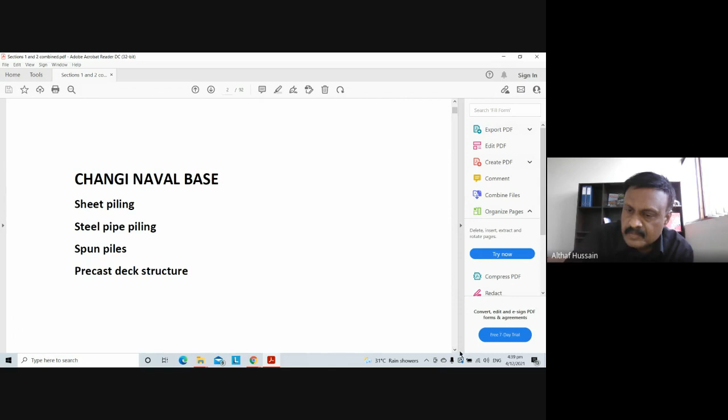Together with this project, there was one beacon, called the Frontier Beacon. This was constructed 3 kilometers from the shore, and is supported by 4 steel pipe piles.

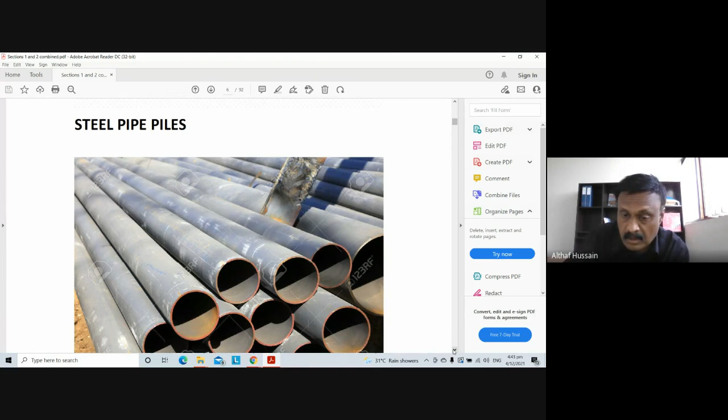These are steel pipe piles. Before driving, they are tubular sections. The piles are classified based on materials - one is steel pipe, steel, and the other is reinforced concrete, which includes precast piles as well as cast in situ piles. These are pipe piles before driving, and here you can see the piles driven in the sea.

These are the spun piles, as I was talking about earlier. They are also tubular, with a hollow portion at the center. They're called spun piles because the manufacturing involves spinning - the wall is very thin and reinforced to make sure the concrete is properly compacted inside. During spinning, the concrete has no honeycombing, giving a very sound, compact concrete. That's why they're called spun piles, manufactured by spinning.

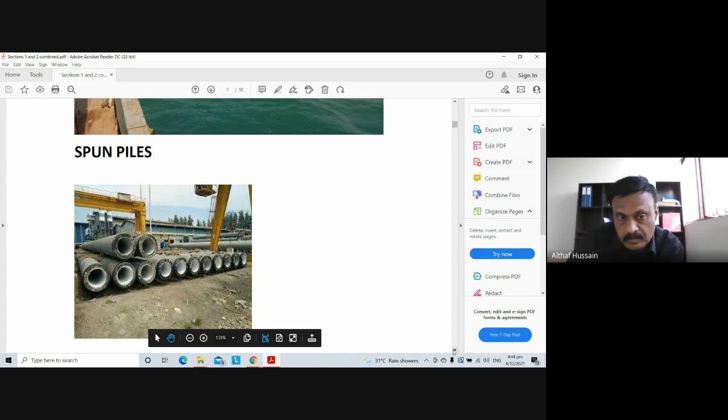The spun piles usually have steel shoes at the toe, because these precast spun piles are driven into the ground using very heavy hammers. In order to facilitate penetration through hard stratum, there are shoes at the bottom. The first section usually comes in lengths of 12 meters, 6 meters, and so on. After driving the first section, we join the next section by welding, then continue driving until the toe level is reached.

The depth of penetration depends on the load it will carry. In piling, pile capacity comes from two factors: end bearing and skin friction. Skin friction is from the periphery area of the pile interacting with the soil, while end bearing depends on the stratum it's founded on. The depth and size of the pile are decided based on the loads to be taken.

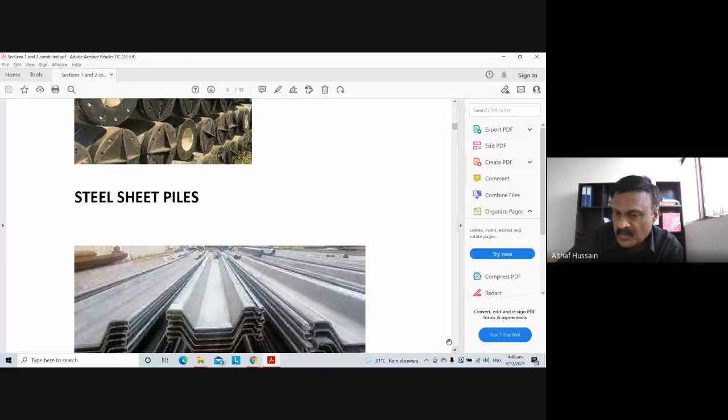Then there are steel sheet piles - this is before driving and this is after driving. Piles are also classified based on function. One function is as foundation piles - spun piles, bore piles, steel pipe piles are basically for carrying load as foundation piles. Whereas the sheet pile is usually a retaining structure, or acts as a fender wall in water. For retaining on land, it will be an earth retaining structure.

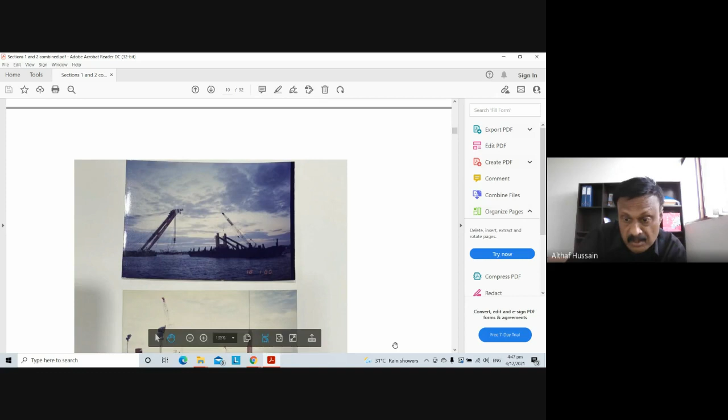These are some photos during construction. Here you can see the barges - the crane barge, the floating barge, material barge, all those things. Here you can see the spun piles, and here we have the sheet pile, and this is a portion of the barge in the photo. These are all spun piles, and these are temporary structures for facilitating access onto the pile for working.

So above the pile there'll be a pile cap. So the pile cap construction, then followed by a deck structure. The deck structure was all precast units, brought from Malaysia and Indonesia at that time. All the transportation is by barges, and the barges will be propelled by tugboats.

These are some photos during the construction of the Changi Naval Base. When we started, in the beginning, the first month or so, there was an unprecedented high tide, much higher than usually expected, and a portion of our construction collapsed into the sea.

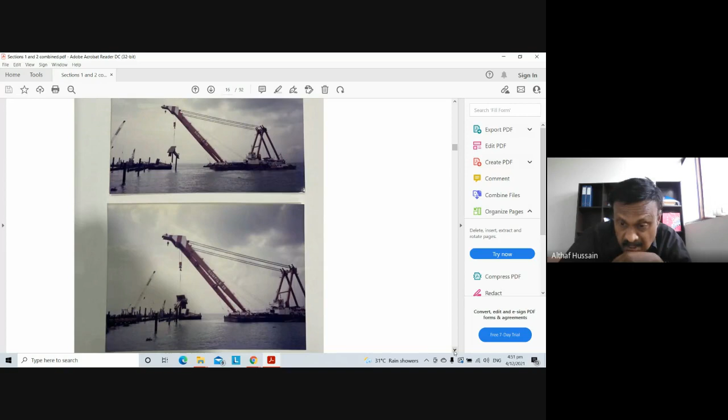Another project I have been involved in is Marina Bay Sands, a recent one, within the last 10 years or so. This project has diaphragm walls and bore piles. Just now I told you, based on function, these ground engineering structures can be divided into two types. In this case, the diaphragm wall is an earth retaining structure, and the bore piles are the foundation piles.

Marina Bay Sands comprises three 55-story buildings with a roof garden. Here the bore pile sizes usually vary from 500mm diameter to 3 meters and plus. Marina Bay Sands involved pile diameters up to 3 meters, and the depth goes to about 60 to 70 meters. All this depends on the column loads, how much load needs to be carried by the column. So the pile layout, sizes and numbers are all designed based on these load combinations.

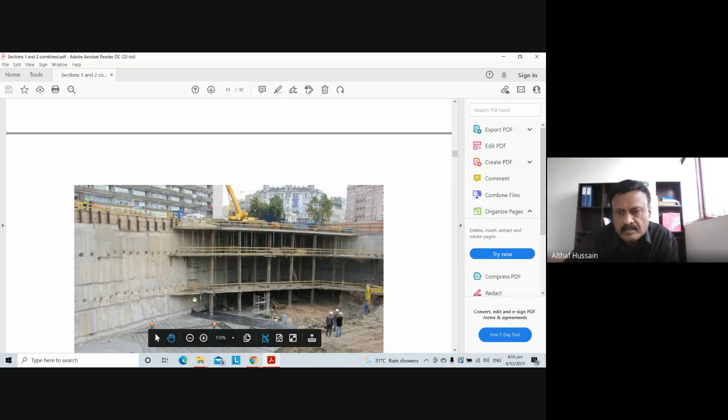Another prestigious project I have been involved in is Jewel, at Changi Airport, one of the busiest airports in the world. Recently a building called Jewel was constructed. This was built concurrently while all flight operations were going on, because no operation can be stopped for construction, and also the area around Changi Airport is very congested with busy traffic all the time. So a lot of traffic diversions had to be done for this.

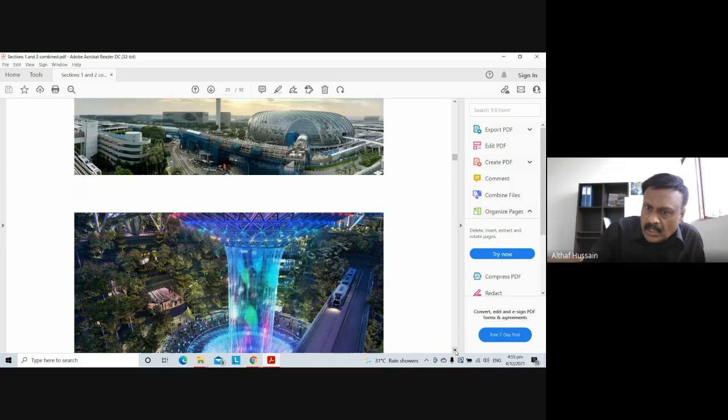This project, the Jewel, involves 5 basements and also 5 stories. This is inside the Jewel, the fountain inside the Jewel. It attracts a lot of tourists from all over the world. This is a SkyTrain track.

So here it is, basically diaphragm wall and bore piles, and there were contiguous bore pile walls also. Diaphragm walls, as I told you, are concrete panels, and bore piling is for foundation.

This contiguous bore pile wall is another ERS, earth retaining structure. The contiguous bore piles involve bore piles installed continuously with a small gap. I will show you a photo - see, this is a contiguous bore pile wall, a kind of earth retaining structure.

There's a Jewel project for the 5 basements. The area for excavation was bounded by diaphragm walls, but this contiguous bore pile wall was used for the car park ramp. See the ramp going up and down - those ramps, the side earth was retained using the CBP, contiguous bore pile wall.

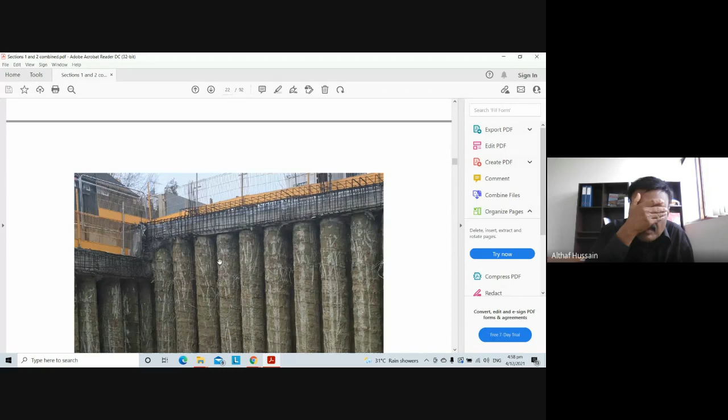Subsequently this gap will be plugged using shotcreting or a skin wall, because this earth retaining structure, apart from retaining the earth, it has to stop water flow - the groundwater, seepage, all those things. So it has to be watertight as far as possible.

So this is also CBP, contiguous bore pile wall. Then another project I had involved is the Police Cantonment Complex. This also involved diaphragm walls and bore piling.

I'm just showing some typical projects so as to introduce different kinds of piling. This is another project, Woodlands Police HQ. Here the ERS, the earth retaining structure, is a secant bore pile wall, and the foundation is bore pile, foundation bore piles.

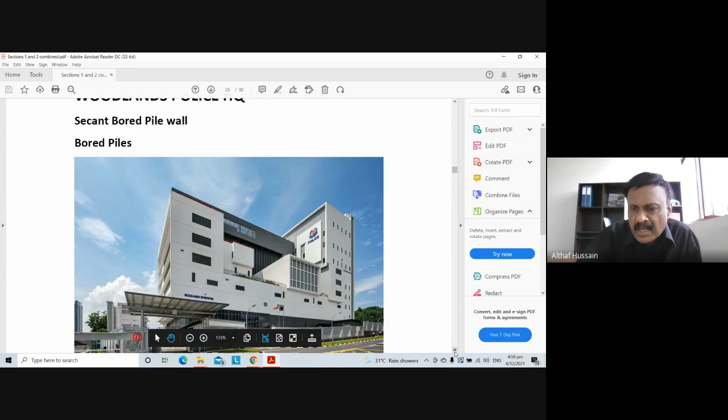So secant bore pile, it is somewhat like a CBP, contiguous bore pile wall, but there's a difference. In CBP, the piles are installed at a spacing where the gap is only about 100mm. In secant bore pile wall, there are 2 types of piles.

One is a primary pile, this one, then we have the secondary pile. If you notice, the secondary pile has a reinforcement cage, whereas the primary pile has no reinforcement. So primary pile, secondary pile - we also call it soft pile and hard pile.

So this soft pile will be installed first. Then we will be cutting through the soft pile to install the hard pile. So in this case, there is no gap - the wall we are producing is without any gap.

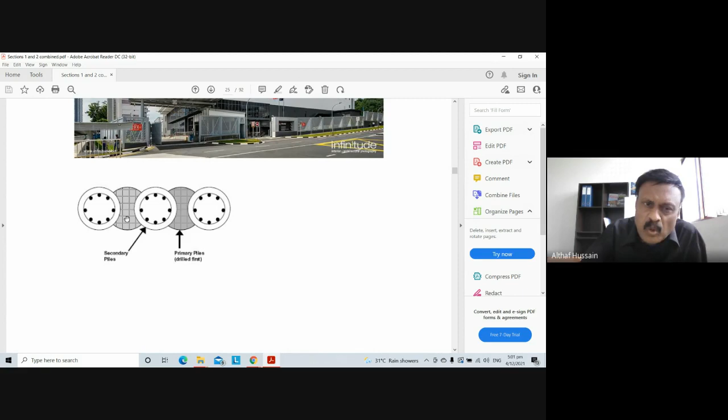Usually the concrete grade used for the soft pile will be much lower than the hard pile. The concrete grade used for the soft pile is usually grade 15 or below, and the hard pile will be grade 30 and above. Grade 30 means 30 megapascals, 30 Newton per millimeter square. So this is a secant bore pile wall.

Another project I was involved in is the King Center development. Its foundation is all steel H piling - steel H piles before installation. It has the shape of H, that's why they are called steel H piles. So this is after driving in.

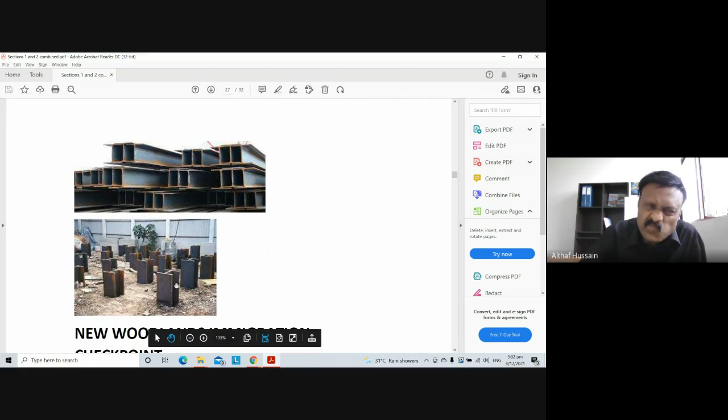Another project is the New Woodlands Immigration Checkpoint. Here the foundation is spun piles. You have already seen the photos of spun pile there - reinforced concrete precast piles.

I'm showing you all these photographs just to have an idea about the type of piles and the sizes of piles. You look at the number of stories, all those things - when the number of stories is more, the column loads will be more, so we need to provide for bigger piles with deeper penetration.

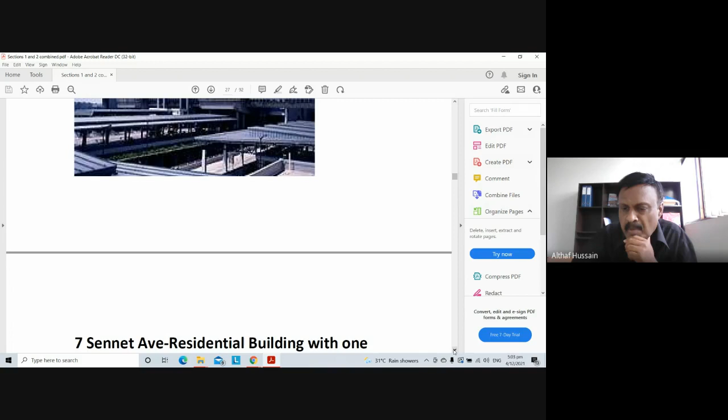Then there's yet another deep foundation which is a micro pile. Micro pile is a very small diameter pile, around 250mm to 300mm. This is a small residential building, 3 stories with 1 basement. That's why the basement earth retaining structure is sheet piles, and the foundation is micro piles.

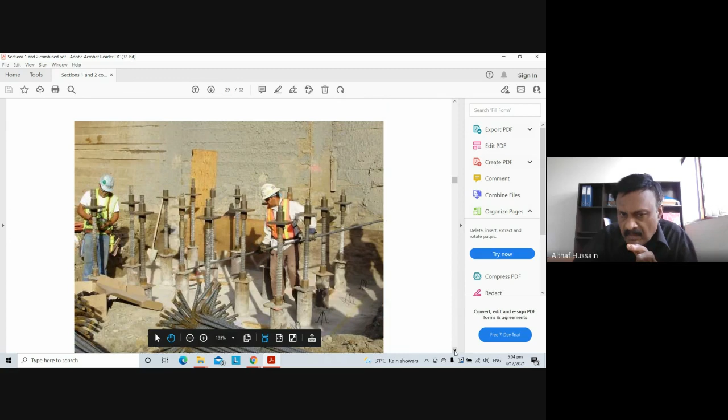So this is a micro piling rig, much smaller compared to a boring rig. This is a boring rig.

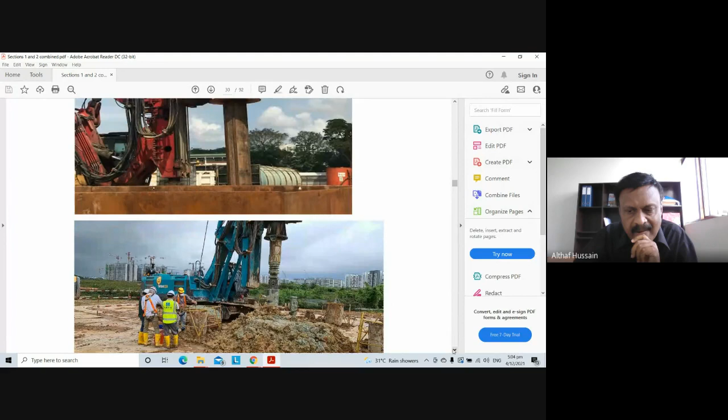So in Kerala also, you must have seen this bored piling machinery. And in Chennai, they are doing diaphragm walls. I don't know if Kerala has any diaphragm wall construction, but I know Chennai metro, they are doing diaphragm walls.

So the diaphragm wall uses a grab for the excavation because these are rectangular panels. So what is used is a grab.

So if you look at the different types of piles we have seen: micro piles, it is a non-displacement pile because we are drilling out the soil, then replacing with concrete and steel. If you look at sheet pile, it is slightly displacing because of the cross section - how much it displaces depends upon the cross section area of the pile. So sheet piles displace very slightly.

Spun pile, it is a significant displacement. You are driving, you have seen the circular section - there is a hollow part inside, but still there is a displacement because of the area of cross section when you are driving into the ground. This is also a driven pile. So here also, compared to a pipe pile, the H pile has less displacement because of the cross section area.

So that's displacement and non-displacement piles. This is an overview. Now I will go into the supervision guide.

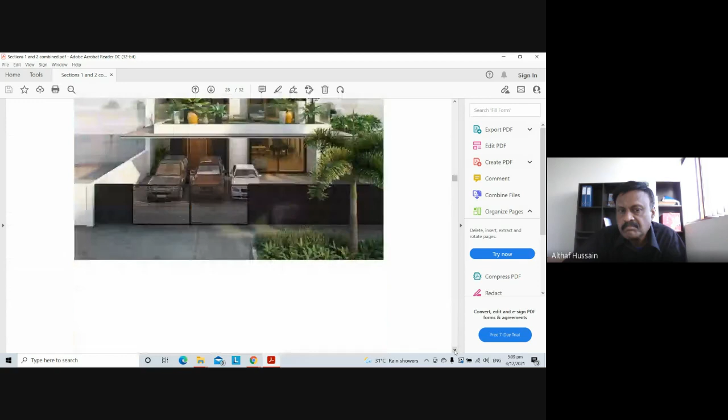Before we start any project, the first thing is we need to have a set of approved drawings showing the layout of the piling. This piling layout will show the setting out, based on the vertical and horizontal grid lines. The complete information will be there in the piling layout - how to set out a pile, because the location cannot go wrong. Then we have the sizes, then the penetration - what is the required penetration, all these things will be in the drawing.

There should be the latest set of drawings at the site. This is very, very important, because sometimes if the site is not provided with the latest drawing, and the installation is carried out based on superseded drawings, that has a lot of consequences: cost, time, also quality.

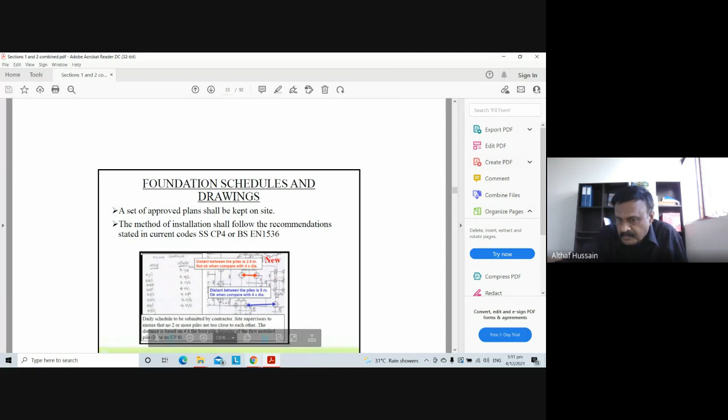Another aspect is underground services. In Singapore, all the services are underground: pipes, cables, pipeline, sewer line, water pipes. Usually all these things are within 1 to 2 meters. So before we start any excavation work - piling, boring is an excavation work, or driving also - before carrying out any activity on site, the first thing to do is get the services drawing from the authorities.

Because damage to underground services has really, really severe consequences. Sometimes if you hit a service, it can lead to severe injury or even fatality, apart from property damage. So it's very important to make sure that before we start any digging, boring, or driving operation, we need to get all the services drawings.

So what are the services? Are there any services clashing with the proposed piling points? If we go and hit an electric cable, it can lead to explosion, it can lead to electric shock. Then there are gas pipes - leakage of a gas pipe can also lead to fire, explosion.

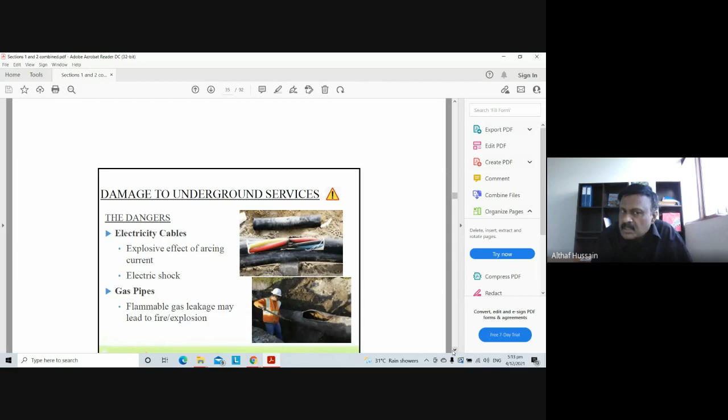It's just a photograph of water pipes, if the water pipe is burst or whatever. Singapore is a very crowded city with so many buildings. So if any of these things happen, the consequences will be really very severe. We have to ensure that before we start any digging, driving in, or boring, whatever activity we are doing is away from services. Sometimes the damage can be very expensive too.

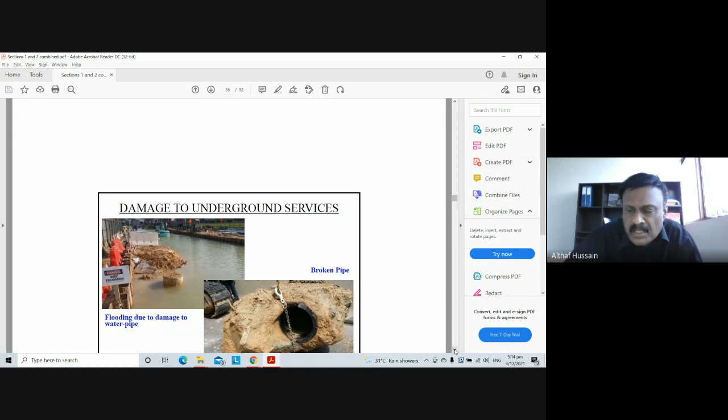It's very important, especially nowadays, as there are many mobile service providers like SingTel, M1, StarHub, and all their cables are underground. If you hit one cable in the city area or anywhere, the mobile service will be affected for a few hours. And if you damage this kind of cable, the penalty is about $1 million, which if you convert to Indian rupees is about 5 crores, because the consequences coming out of such damage are really severe.

A lot of operations will be affected. In Singapore, we never have such incidents. I've been in Singapore for 30 years and I've never come across any incident of no power - it is always there. Singapore has its own reputation for so many things, so any disruption like this, you will end up in jail.

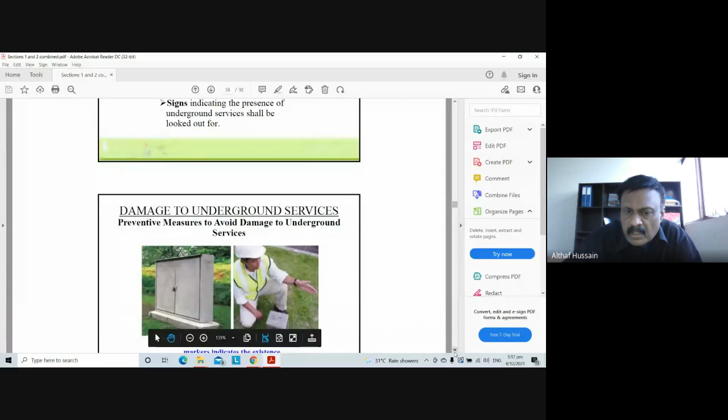So how do we prevent damages? We have to look at the services plan and our piling plan, then closely check to see whether there are any services in our area of work. There will also be some signs like a telecom box, and other markers on the ground showing there are underground services beneath.

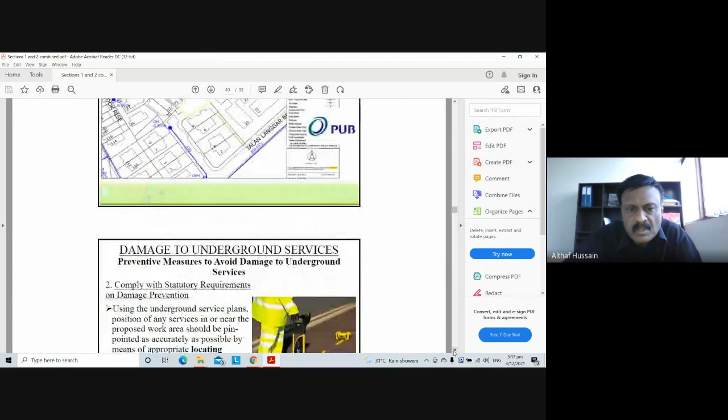Before we commence a project, usually we have to engage an LCDW, that is a licensed cable detection worker. Based on all this, sometimes these drawings may not be accurate, so sometimes we really have to manually make trial holes to see exactly where the service is.

If the service is clashing with our piling points, there are two options: one is to relocate the pile, another is to divert the service. In some cases we may not be able to relocate because as per the design requirement, the location has to be at a particular point. So if that point has underground services, we have to apply for diversion of services away from our area of work.

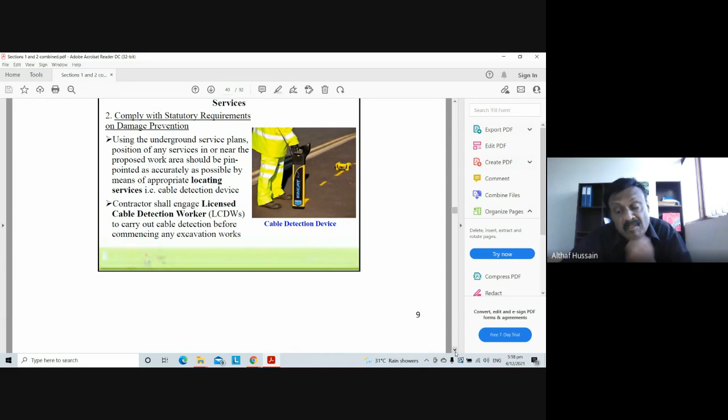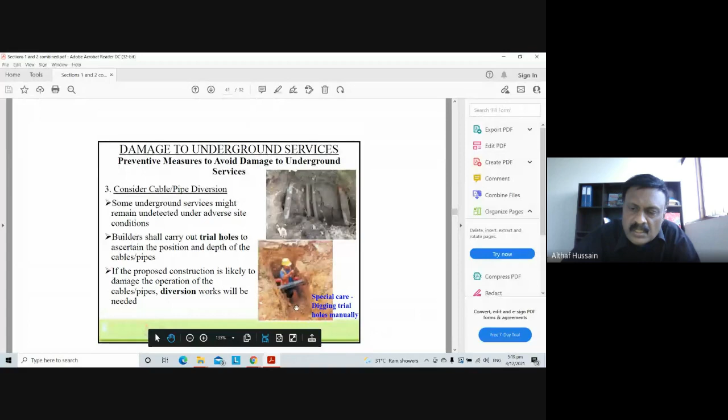In some cases we have to protect the services. Suppose we are going to do the pile installation very close to the services, then we have to protect them so that during our piling operation the services are not damaged.

Also, after doing the trial trenches and backfilling them, we need to put up signage showing what cable, how deep, all these things, because on site there may be changes in site personnel, so when new people come in they should be able to see all this information.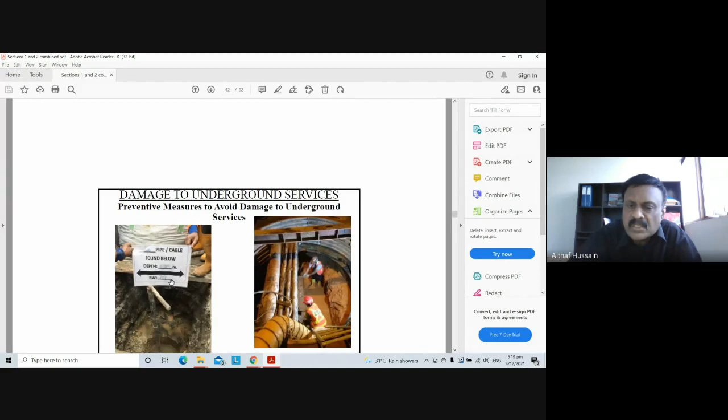Now, I told you based on the method of installation, there are two types of piles: non-displacement piles and displacement piles. So now we look at the non-displacement piles. In non-displacement piles, the soil is removed and then the bore hole is filled with reinforced concrete.

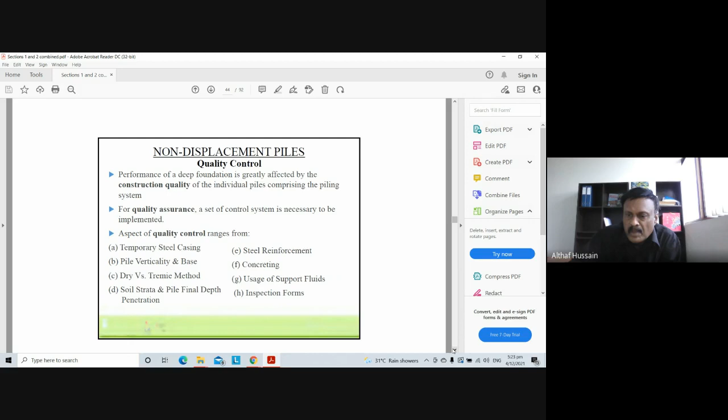Okay, about temporary steel casing. So why do we need temporary steel casing? It's for temporary stabilization for drilling works through soft, weak, or unstable ground.

This is a temporary casing. It will avoid the soil from collapsing into the borehole, and it also acts as a guide for the drilling auger head. Usually the minimum temporary casing is about 5 meters or so. It also mitigates something called overbreak.

In the overbreak area, the skin friction is affected, so the strength and capacity of the pile is affected. This also leads to a lot of concrete wastage. If the intended diameter is 1,000 and some section has a diameter more than 1,000, we end up wasting concrete, and that is money.

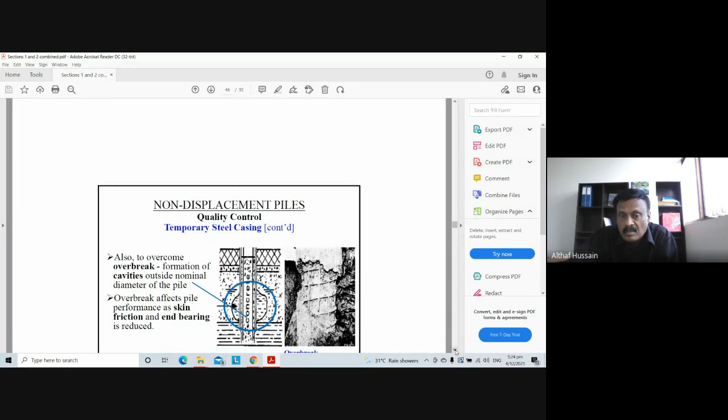Okay, this is a temporary steel casing. Usually you have to keep it 1 meter above ground level for safety consideration.

There are instances whereby people have fallen into the borehole - a 30-meter, 40-meter borehole. During rebar installation or some operation, there are incidents whereby workers have fallen into the borehole. Once they fall in, that's it, we cannot rescue them.

So it's a safety requirement that the temporary casing needs to be at least 1 meter above ground level, and into the ground it will go at least 5 meters. Depending upon soil condition, the temporary casing length can go up to 12 meters. Sometimes even 12 meters cannot prevent collapse of soil, so then we may keep on extending to 15 or 16 meters.

But the longer the temporary casing, it will take more time, and our productivity will be adversely affected. So we have to look at the soil conditions and decide what should be the length of casing to be used. Usually before starting any project, I will be doing some trial boring to see what is the soil condition and what temporary casing length is required.

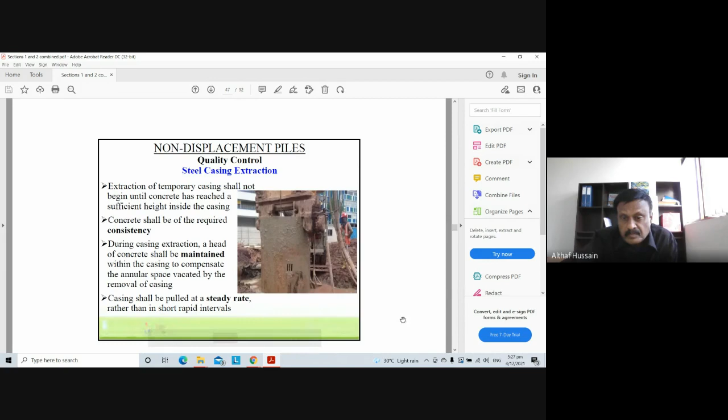So these are just some photographs of the steel casing extraction. It can be extracted using a vibrator with a crane. Some boring rigs have a rotary head, and using this rotary head, we can install and extract the casing.

In some areas, the vibro hammer may not be allowed, because if you are doing pile installation very close to existing buildings, especially sensitive buildings, there is a vibration threshold that cannot be exceeded, since the vibro hammer creates a lot of vibration. In such cases, we use a boring rig with a rotary head and a casing adapter, so that the machine itself can drive in and extract the casing.

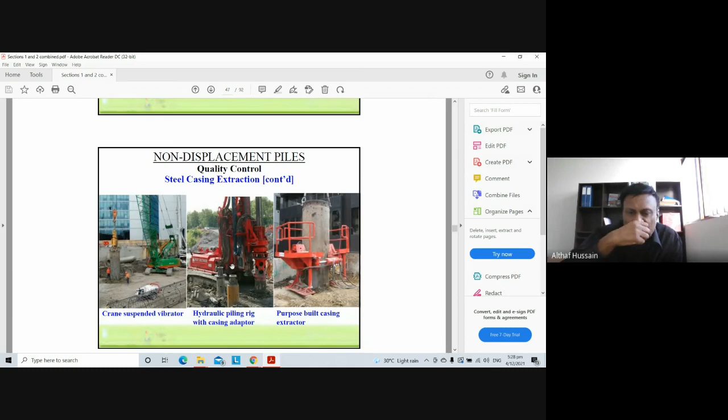Okay, pile verticality. So the piles are designed to be vertical, because basically the piles have to take the compressive force, and concrete is good in compression. If the pile is non-vertical, then tensile forces will be induced into the concrete, and the concrete cannot take tensile forces.

So usually the tolerance is 1 in 75. That means for every 75 mm vertical, the allowable horizontal deviation is just 1 mm.

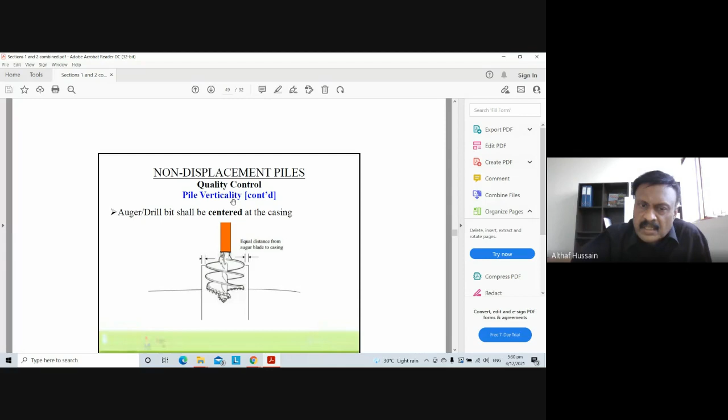So pile verticality at all stages needs to be monitored. Right from the beginning, when you are starting the boring and positioning the auger, you have to make sure that it is central to the casing. First, the casing should be installed vertically - you have to check the verticality. Then when we are starting the boring also, we need to ensure the verticality.

So the verticality is monitored using spirit levels. Using the spirit level in both directions, we have to check the verticality. The boring rig itself also has a kind of spirit bubble inside, so the machine should be adjusted to make sure the bubble is at the center. The Kelly bar should be truly vertical.

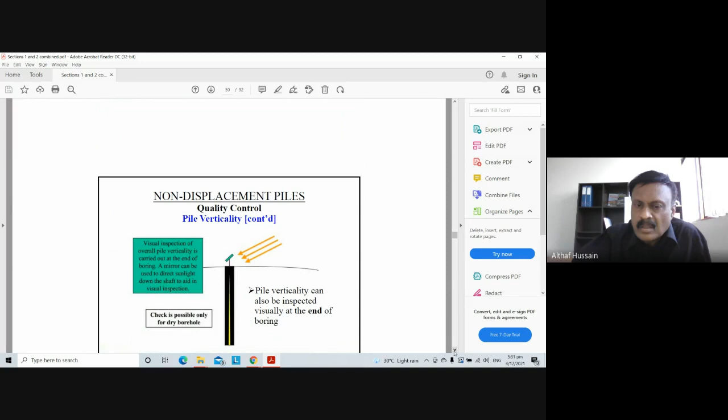So for dry piles, using a mirror we can also check the verticality, whether we can see the toe from the top by reflecting the sunlight or using a torch. This is applicable for dry piles.

So if the pile inclination is greater, then the QSS has to consult the QP. QSS is the qualified site supervisor. Qualified site supervisors are basically resident engineers and resident technical officers.

Resident engineers are engineers graduated from recognized universities. For your information, in India, only very few institutions are recognized in Singapore. Even CET Trivandrum is not recognized. I got accreditation as resident engineer because of my IIT degree.

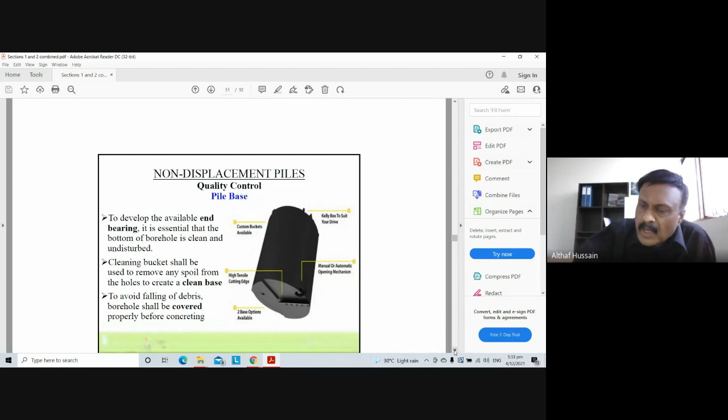So this is about ensuring a clean toe. After boring, before we install the reinforcement cage, we have to ensure there is no soft toe. For that, a cleaning bucket will be used to thoroughly clean, so that before we place the reinforcement cage and concrete, we clear all the slurry from the pile. It has to be clean so that the slurry doesn't get mixed up with the concrete, which will affect the integrity of the pile.

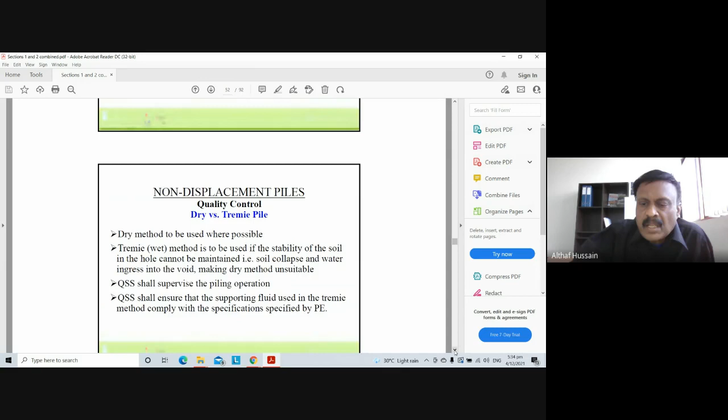So these are all about the quality of the base. Then, there are two methods: dry method and tremie method. The dry method is faster, and it's possible when the soil stratum is very firm soil with no collapse of soil. In this case, we'll just be boring and placing the reinforcement cage, then pour the concrete.

But in some cases, if the water table is very high, we cannot do the dry method. Even after installing the casing, when we are boring deeper, water will be percolating and seeping into the borehole. In such cases, in order to stabilize the borehole, we'll be pouring in stabilizing fluid. So dry drilling is suitable for very stiff to medium dense soil, and only for deep groundwater table.

In the tremie method, which is suitable for all kinds of soils, we have to use a supporting fluid, usually bentonite or polymer. The density of this bentonite or polymer solution is more than that of water, so it supports the borehole. This bentonite or polymer fluid has criteria on viscosity, sand content, and other properties, which will be tested on site to ensure borehole stability.

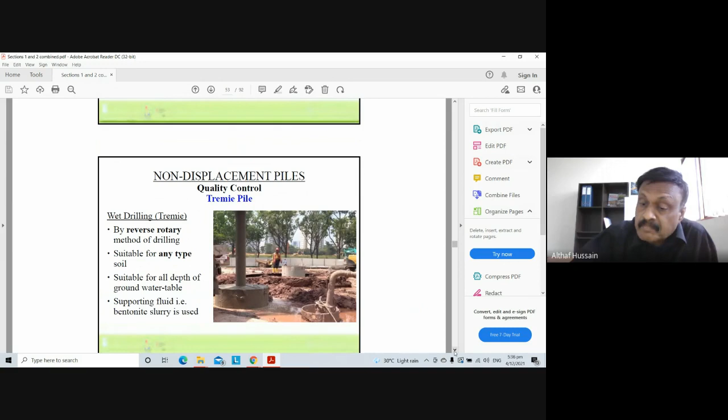So this is tremie concreting. Why is it called tremie? Because we'll be using a tremie pipe. The tremie pipe will be lowered up to the toe of the borehole, so the borehole is filled with the fluid. Then when we are pouring concrete through the tremie pipe, the concrete will be displacing the fluid up.

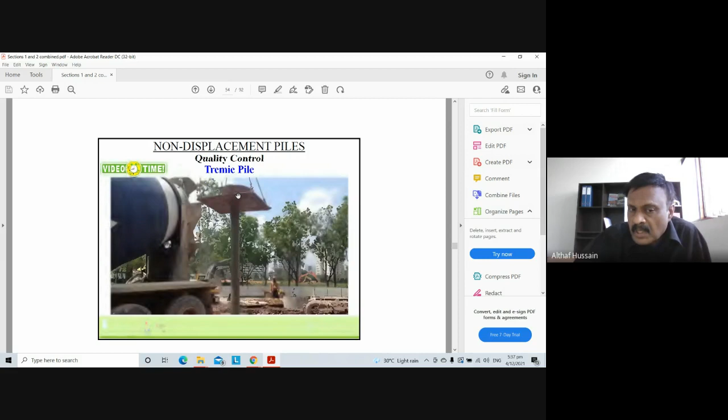There will be a material called vermiculite, which will create a membrane between the fluid and the concrete, so that when displacing from below, we are displacing the fluid with the concrete. The tremie pipe is lowered up to the toe of the pile, then we pour concrete from the top of the tremie pipe. The concrete reaches the bottom, displaces the fluid up, and it will be discharged out.

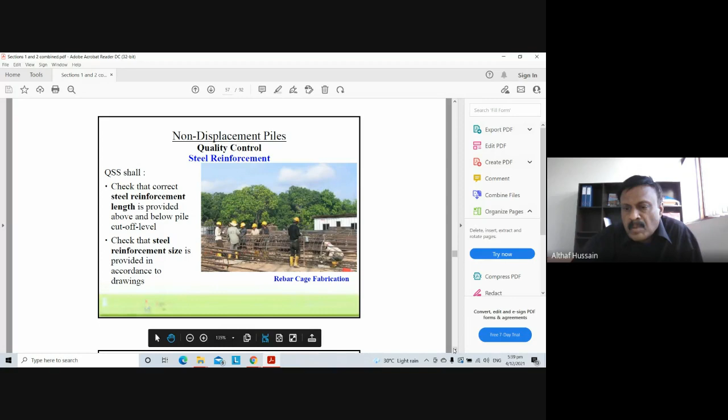Then after the toe level is confirmed, you have to lower the rebar cages inside. So these are all rebar cages, based on the designs. All the detailing will be in the piling layout plan. As I told you, for compression piles, the length of the rebar cage will be specified in the drawing. For tension piles, it will be all the way down until the toe.

Here are some pictures of the reinforcement. Usually the rebar cages are fabricated in 12-meter lengths, so if the pile depth is, say, 30 meters, then we have to use more than one cage. In that case, we need to do lapping.

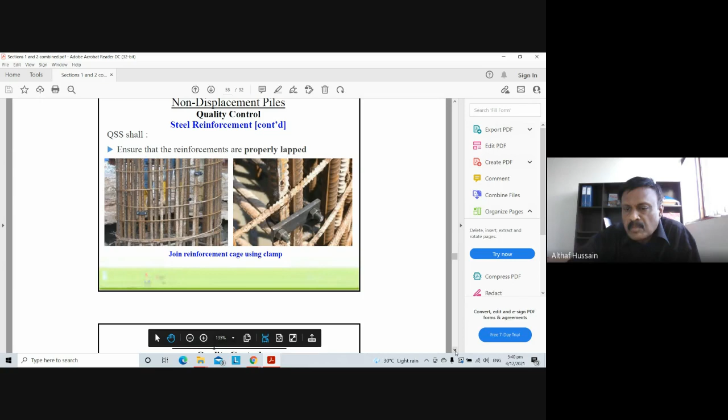This lapping can be done in two ways. After lapping, we can do welding or we can use the clamp, called the U-bolt. The rebars will be clamped together using the U-bolt. Another way is welding the rebar, but welding is time consuming, so for productivity purposes we always prefer using the U-bolt.

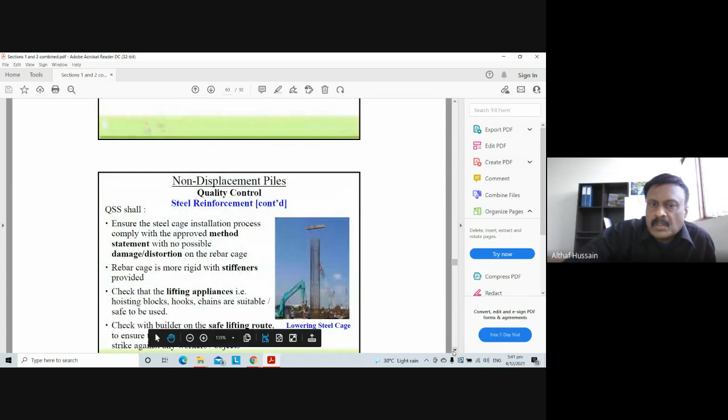Also, lifting the 12-meter cage and installing it, there are safety aspects to be followed. There may be nearby structures, there are personnel around, so there should be a lifting plan showing how we are actually lifting and installing the rebar cage, ensuring safety.

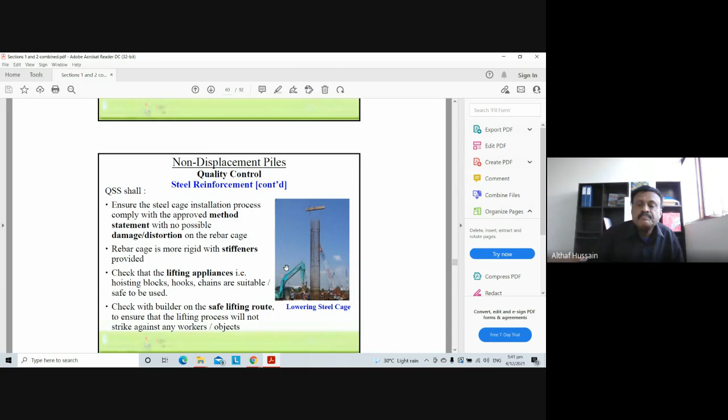Okay, the concreting. Compared to concreting for superstructure or other structures, pile concreting should have some unique qualities. It should displace fluid and it should be self-leveling, because we are not using a vibrator to compact it. So it should be self-leveling and it should flow around the reinforcement cages. When there is a congested rebar cage, the concrete should flow into all portions. There should not be any honeycomb or any cavities inside.

So for the concrete workability, a slump will be specified, and the slump will be tested at the site before we actually place the concrete inside. Now to ensure it can flow and is self-leveling, concrete is also placed using a tremie pipe so as to avoid segregation of concrete. If you don't pay attention to all these things, the integrity of the concrete of the pile will be affected.

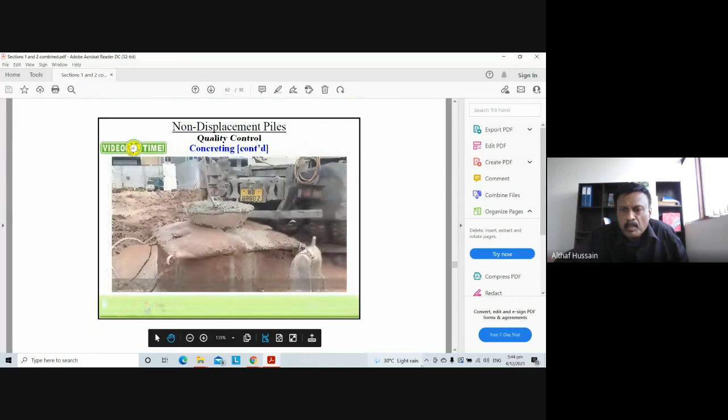Usage of support fluids: I told you it can be either water, bentonite, or polymer, but water may not be effective most of the time, so we go for bentonite or polymer. The usage of polymer is increasing. These are the reasons, comparing bentonite and polymer: polymer mixes instantly, whereas bentonite requires 24 hours for mixing. Then the polymer can be recycled again and again, whereas bentonite is restricted to 2-3 times.

Then for bentonite, sand content is a problem, and that affects the concrete strength. Environmentally, polymer is a biodegradable liquid, so disposing of bentonite needs treatment before disposal, whereas polymer is biodegradable because it will break down on its own.

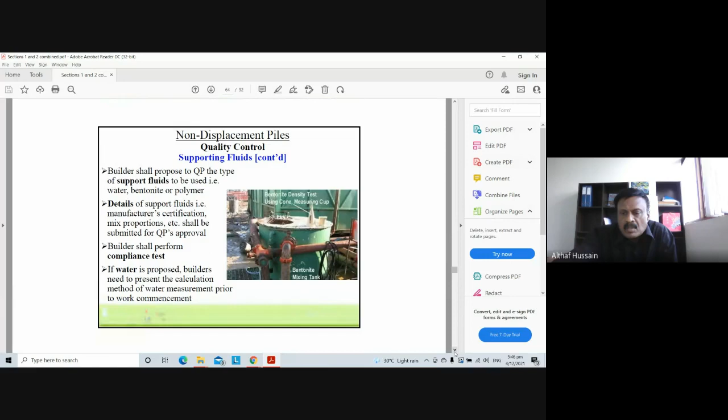So these are just some details of the supporting fluid, bentonite polymer. This has a specification. Before commencement, all these specifications and documents need to be submitted for approval.

Once a pile is cast, there should be a work pile record showing all the records: what is the starting of boring, what is the boring depth, what is the detail of reinforcement, what time the boring started, what time the boring ended.

Then the concrete: what time the concreting started, what time it ended, what is the theoretical volume of concrete required, and what is the actual volume of concrete used. Using that, we can calculate the overbreak. If the overbreak is too high, we have to justify that the pile is still okay.

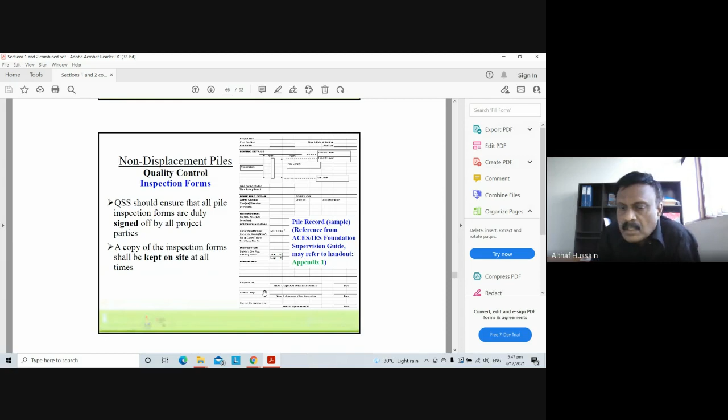During piling, environmental pollution control is very important. Authorities have specified the noise levels depending upon where we are working. If we are doing it very near hospitals and such, the noise levels allowed are more stringent.

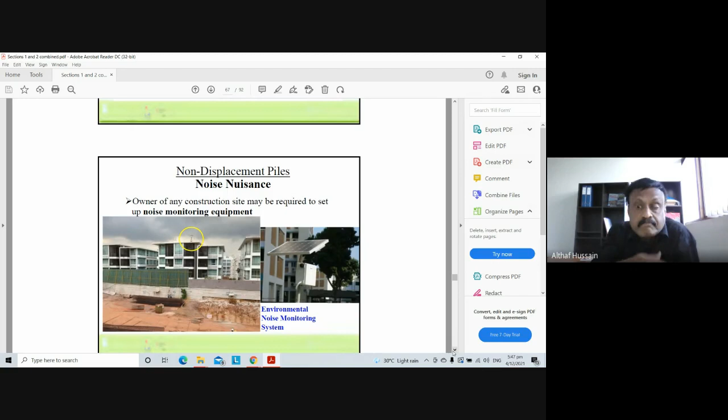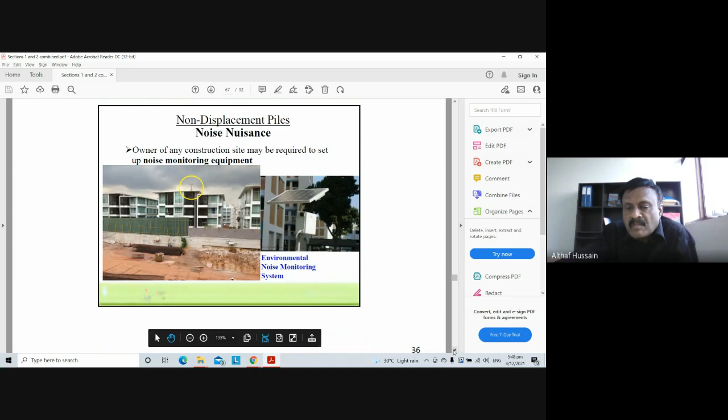We have to install noise monitoring and vibration monitoring before we start the piling operation. This is continuously monitored, and periodically we have to submit it to the authorities. These are all very important authority requirements.

If you exceed the noise beyond a certain limit, the contractor will get summons from the environmental agency. The first time offense is $5,000, then it increases to $10,000. If you continue, we will be summoned to the court.

Then the vibration - you have to control the vibration. Some threshold is always set that cannot be exceeded, because there are buildings close to each other, and these vibrations will create problems.

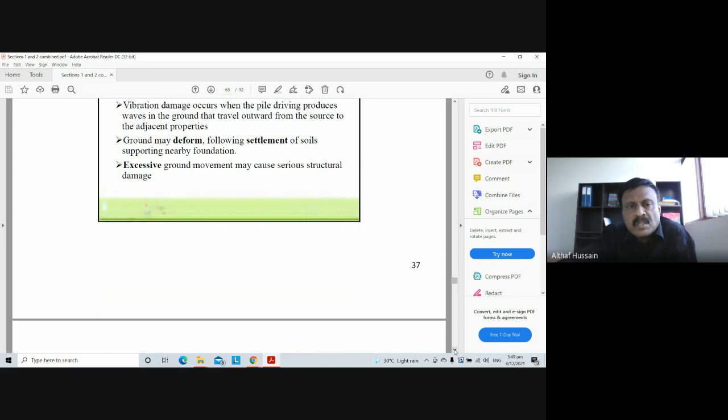So we need to prepare a vibration monitoring plan, and we have to comply with all the requirements. For different types of buildings, different vibration limits are set.

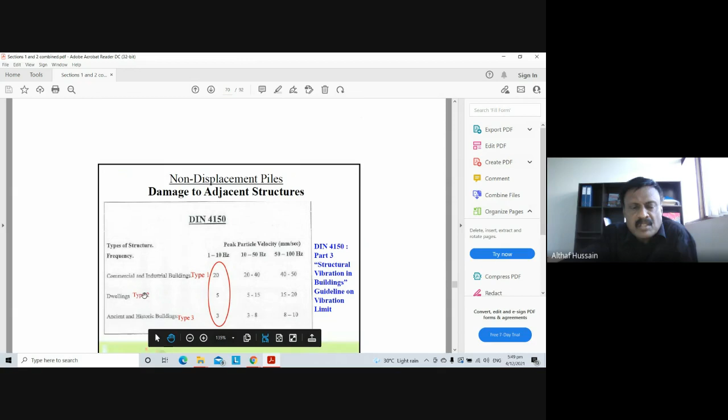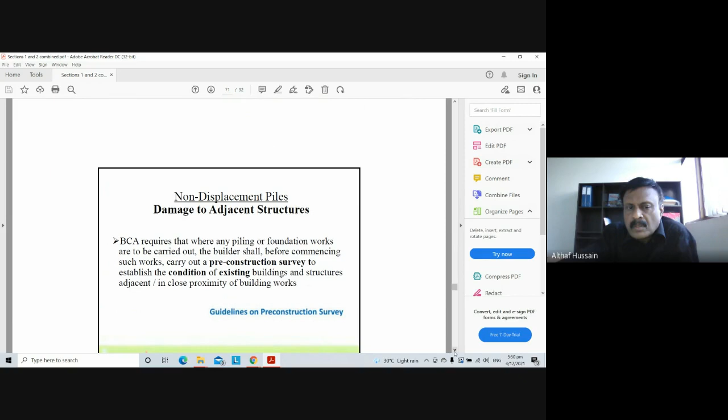There is a requirement before we start any project - we need to do a pre-construction survey. Before we start any excavation or pile driving, for the surrounding structures we need to engage a specialist to do a photographic survey. The purpose is to record all the existing defects.

Later, when we are doing the piling operation, sometimes existing defects may get worsened. So first there will be a record of what was the situation before, what was the condition of the surrounding structures before we started piling. This is called the pre-condition survey report. It involves a lot of photographs of the surrounding structures - they go inside and take photos of even the minor cracks, everything. This will be a record as a base, so that future complaints can be addressed based on that.

So there are BCA guidelines. When we are doing a piling operation, if it is non-displacement piles or piles with small displacement, such as H piles or micro piles, the pre-condition survey needs to be done within 10 meters of the development, since the displacement is not so significant.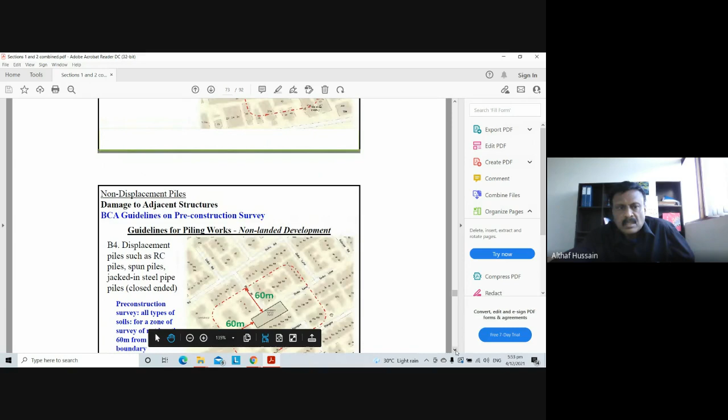The earlier one was small displacement. This one has more displacement - spun piles, steel pipe piles - so here it's 60 meters.

Despite all these precautions, if there is any damage to the surrounding structures, then the contractor has to address it before proceeding further.

So these are all good practices: environmentally friendly, low noise, no vibration. This involves thoughtful planning of the activities and the use of machinery so as to mitigate noise and vibration. Usually for the boring rig, there will be noise barrier panels installed to mitigate the noise.

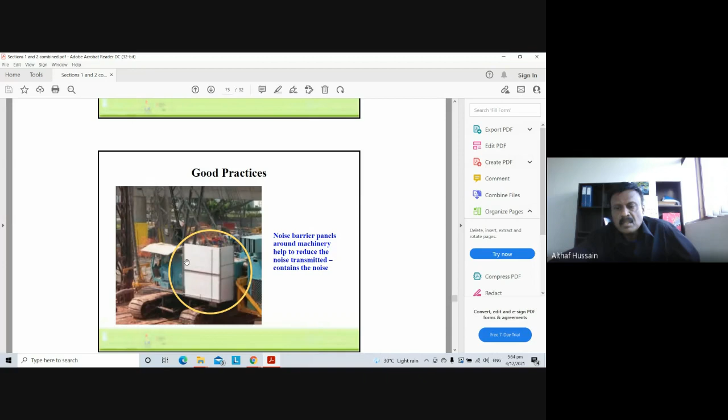In some cases, a noise barrier will be erected around the working area. Then the type of machine used can also affect the noise and vibration created.

Earlier, driven piles used to be percussion piles, meaning dropping a 15-ton or 7-ton hammer on the pile, which was very noisy. Currently they are replaced with jacking-in piles, so there is no noise at all.

The BCA, the Building and Construction Authority of Singapore, every year rewards good contractors who are practicing good methods.

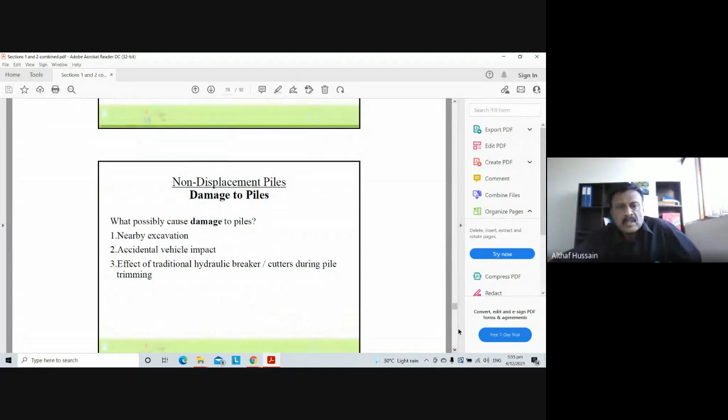Now, damages to piles already installed. After installing a pile, if you are doing nearby excavation, there can be soil movement that damages the pile. Also, while the site is in progress, especially driven piles will be protruding above ground level, so if any crane or boring rig hits it, that can damage the pile.

Then during hacking - after casting the pile, we have to hack the pile to remove the top loose concrete portion, down to the cutoff level. If you use a hydraulic breaker to hack the pile carelessly, that can also damage the pile. So all these factors need to be attended to.

Also, during pile installation, after casting one pile, we are not allowed to install another pile within 5 diameters. That means if you are installing a 1000mm diameter pile, the next pile should not be installed within 5 meters, within 24 hours, because the concrete is still fresh and has not attained the required strength. If you bore too close, it will affect the concrete integrity.

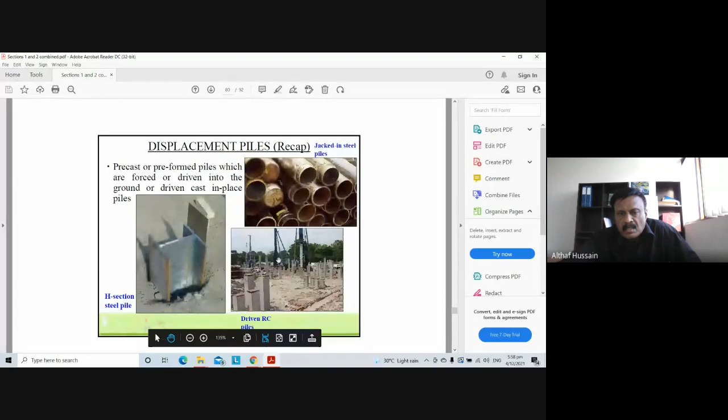The quality control of displacement piles involves various aspects: before driving the pile, during pile driving, then connecting or jointing the piles, and after completion of driving - quality controls must be enforced at each stage.

Prior to pile driving, for any project, there should be a BCA permit before commencing work. BCA is the Building and Construction Authority of Singapore. So either it is BCA or LTA - the Land Transport Authority - controlling the infrastructure. All other buildings are under BCA. All the drawings need to be approved by BCA or LTA as applicable.

The size of the piles and the piling plan all need to initially be submitted by the consultant to BCA for approval before they can be implemented and executed on site.

During pile driving, we have to notice the displacement, because especially for RC piles, there will be displacement. This displacement can cause heaving of the ground. We have to observe all these things, and if there is anything serious, we have to stop piling, investigate, and carry out corrective actions.

Then the supervisor should ensure compliance during pile driving, because there will be set calculations specifying the drop of the hammer, the weight of the hammer, and other parameters. All these need to be checked to ensure compliance.

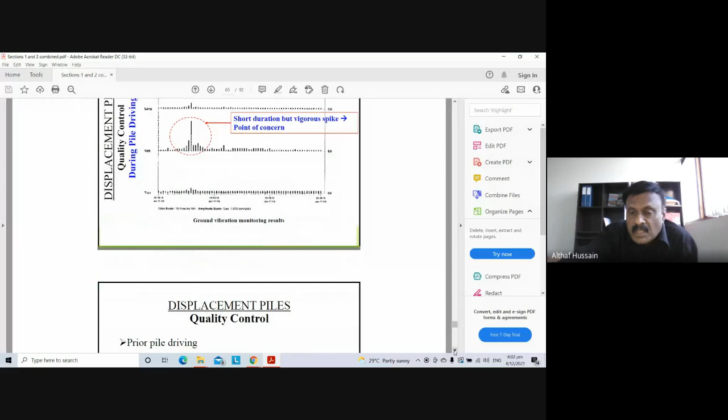This is about vibration. While driving, the vibration cannot exceed the specified limits.

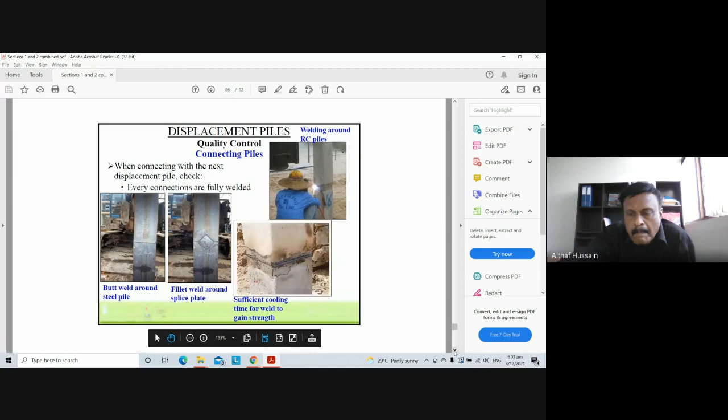So while joining, also we have to check the verticality again to ensure that after joining, the next section is vertical. The vertical alignment is okay.

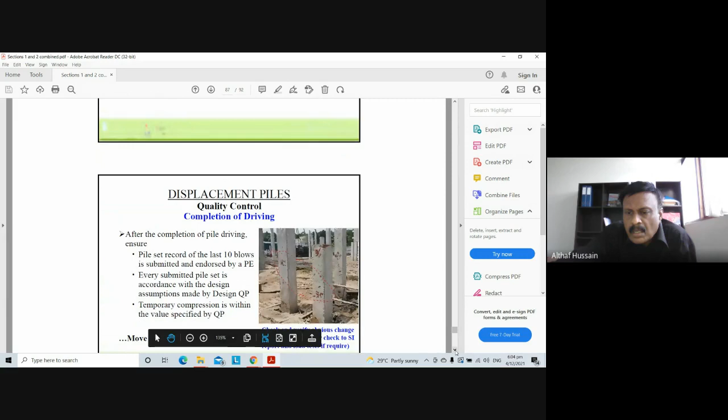Okay, this will be the RC pile after installing. So the RC pile termination usually uses the set. How are we able to determine this? There will be a set calculation.

So, for the last 10 blows, how many mm is it? This will be calculated using Hiley's formula. We have to drive until we achieve the final set for the 10 blows.

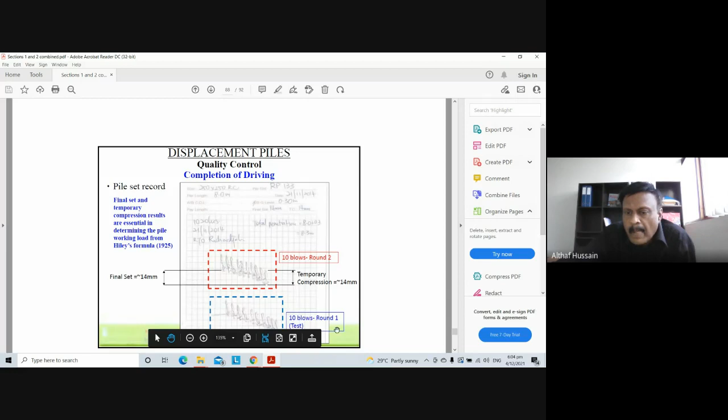In this case, just a sample sheet. For the last 10 blows, the penetration should not exceed 14 mm, and the temporary compression should not exceed 14 either. So these are all calculated based on the requirement. This is Hiley's formula.

So the final set and the temporary compression are measured during the final driving process. This graph sheet will be attached to the RC pile surface. After that, a pencil is held, and at each blow a mark is formed. This shows the set and the temporary compression of the pile.

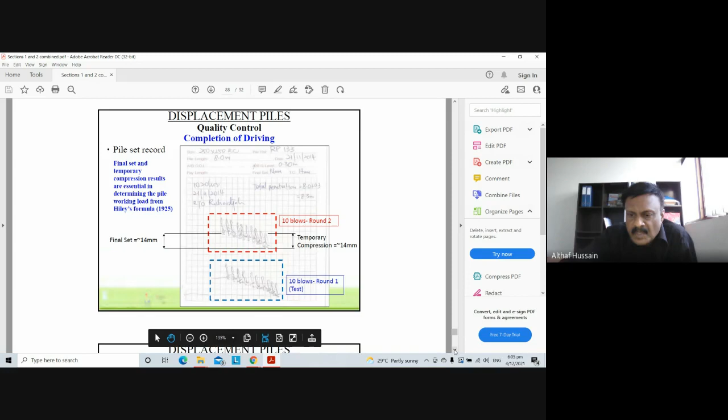Okay, so at the end of driving, you must have a record, the driven pile record. It shows the pile length, the set, the temporary compression, start time, finish time, all these things.

So basically these are the things I have prepared for presenting and sharing with you. Now the time is already up.

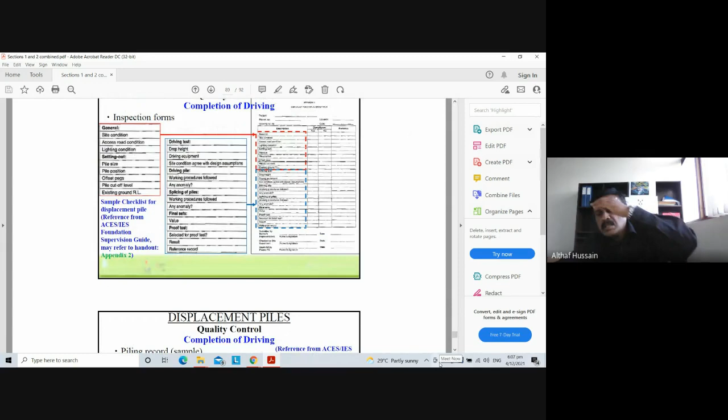Hello, Nirmal. Nirmal just left to finish a class. Oh, I see, I see, I see. So he actually wanted me to wind up the session. Yeah, it's already exceeded.